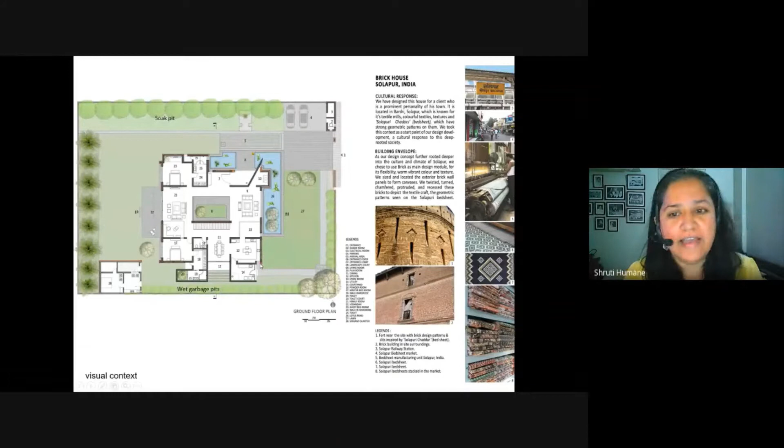So, these are the visuals, the first visual maybe, of how we approach the project and how it looks today. What the landscape does is only complement the building. It is something that gives a beautiful foreground, gives you a hint of what you can see further, a dash of red in the plant material just to complement the bricks themselves.

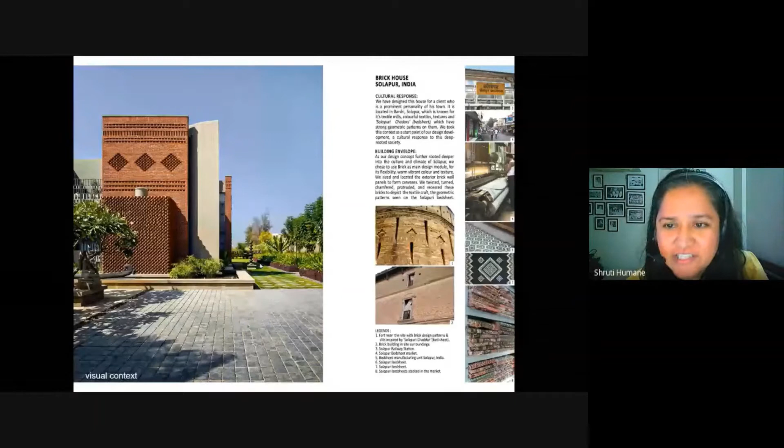This brickwork on site was extremely hands-on, so it was a big learning experience. We did every pattern here with our own hands along with the masons on site. So they were the teachers here for this particular project. It was wonderful working with them. The second, as I told you, was the climatic context. So it was an arid site.

So we had to go in for some architectural interventions like cavity walls. So these are the cavity walls, and this is how the rest of the panels come up one after the other. And every panel we have tried to be different. We have tried to have not a very 2D look, but a 3D kind of effect here by protruding, by turning the bricks around.

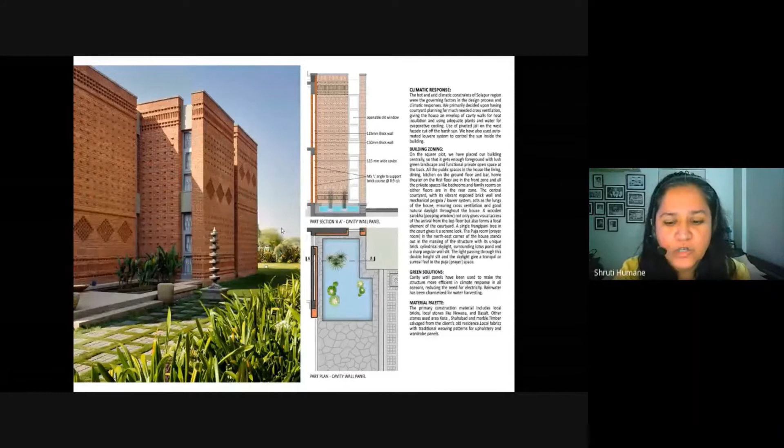The patterns also continue in landscape. I thought the landscape here just has to be supplementary in terms of the plant material, supplementary to the project itself. The water body helps us to take the cool air inside. So these are few of the 3Ds, study 3Ds that we made, and this is how it looks.

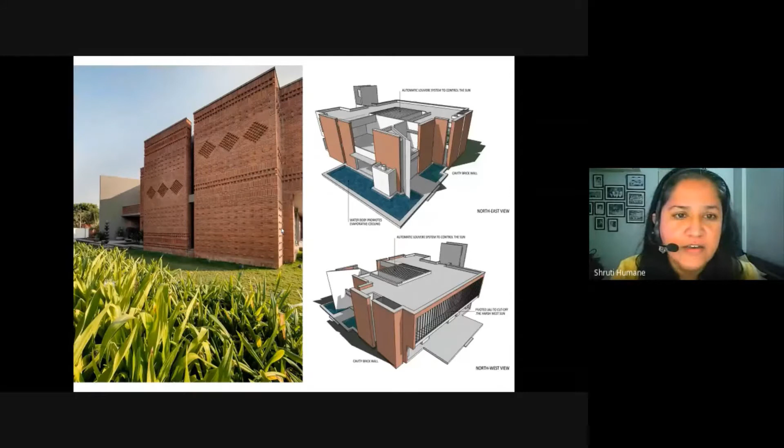So every panel is different. Every panel represents something different in the chadars. This is how it would look in the evenings. The shadows created are pretty interesting. These are few other landscape elements which create the foreground for the project. Another dash of red compound wall.

We also tried few other things like soak pit and taking the whole rainwater at one place. So this particular banana and the other places where that happens. So none of the water goes out of the site. So we have a soak pit. We have other few things that we have done from day one.

So for us, it was important that the architecture, interior, and landscape flow seamlessly into each other. There shouldn't be a boundary which restricts one from the other. So the flow is what, I think, has happened that way. So this is how you see it from the interiors.

This is the internal courtyard. We thought to keep it as minimal as possible because there were lot many things happening on the outdoor. So over here, to give it more of a zen feeling, to give it more of a minimalistic look, the central courtyard, which has a skylight or a big opening on the top, is very minimal.

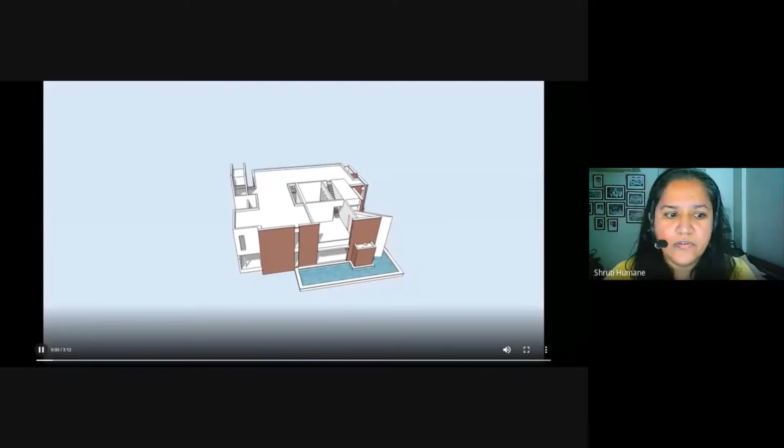Sandeep, I hope the music is here. Yes. Thank you.

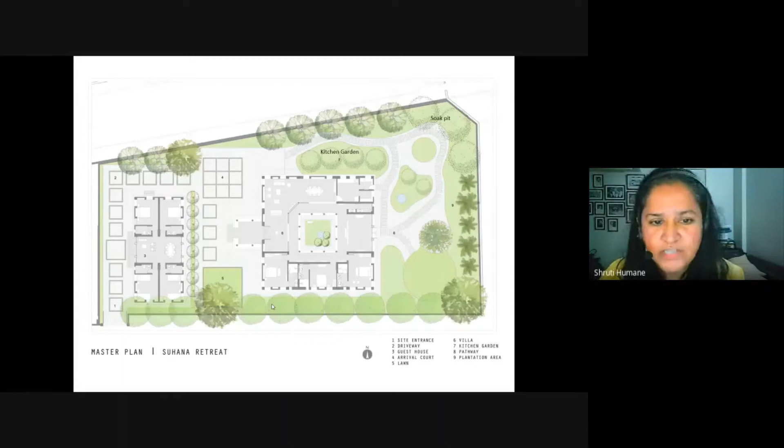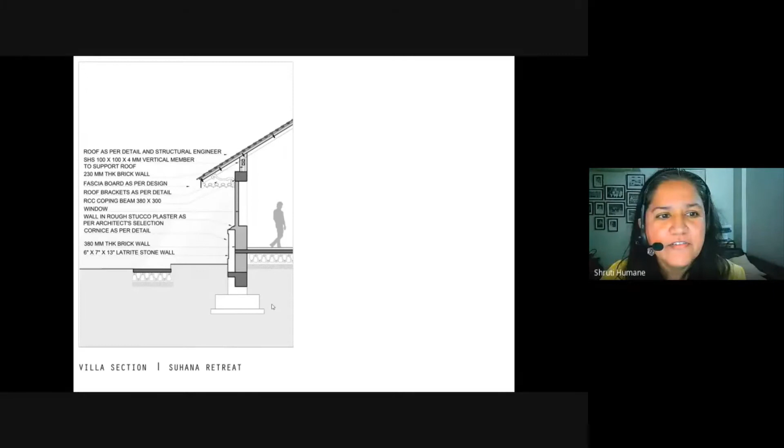It's a sloping roof project. So a few of the architectural sections with the courtyard, yes. The banana is here as well. A few of the architectural details. Yeah, this is how it looks now. Local material of laterite, kadapa is what we use the most in landscape. Rhoeos to complement the red of the laterite and the whole visuals.

This is the arrival area of the house, and this is the central courtyard. The structure here, the columns, the panel, everything we have salvaged from an old house nearby, and then we kind of used it. So it's extremely authentic to the place, I would say.

So this is that one old salvaged part, and then we have kind of used it everywhere. The plant material also shows the tropical Kerala heat. Again, this would also have a small movie clip for itself.

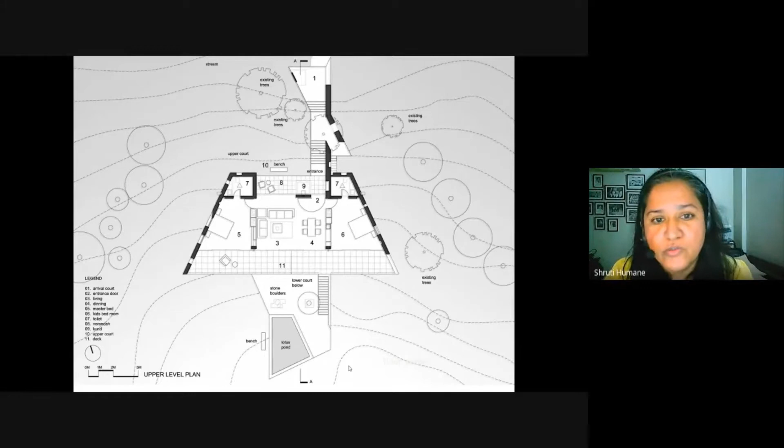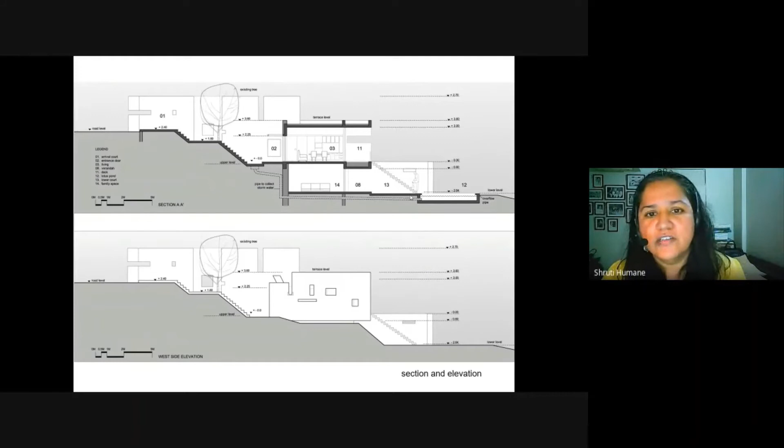Because it was a ridge and a valley situation, we had water flows which we tried to train below the building, have its overflow into a lotus pond that we created, and then beyond to a nala nearby. Here we literally did not cut and fill anything other than just the foundations. We used the topography the way it was. We hardly changed any of the natural stuff around.

The floating edge gives the box a sculptural feel, which was necessary to make it look part of here. It is a very modern looking box, but neatly placed on the side. We planted a lot of fruit trees around because this is part of a school which is called a heritage residential school, and there were kids coming.

So we have labeled all the trees that we planted. We have planted a lot; it's much denser now after the photography. So we have labeled all the trees. It's like a picnic for the school children that come to this house. This is the principal's house in the school. The interiors are very basic, just a dash of green with black and white.

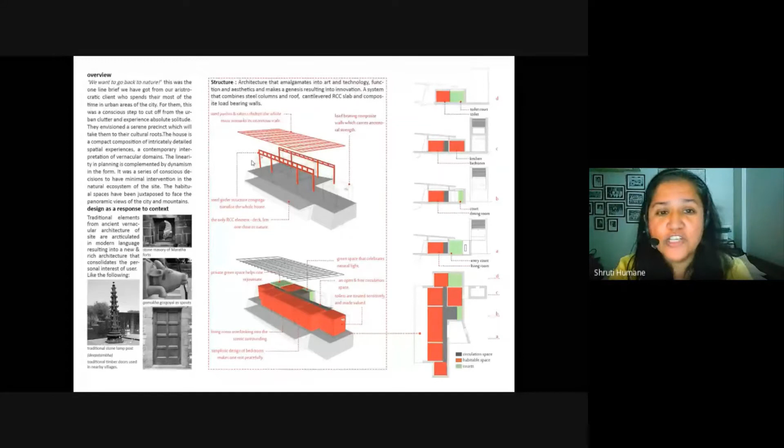So in this project we actually designed a section before we could design the plan itself. The section was devised, this is how it would sit on the site, and then we developed a plan for it. Because it was heavily contoured, we have done a few things like contour bunding. We did a lot of work on the kitchen garden and retaining every bit of water that comes to the site with soak pits, and the plant material which was there. We did not cut even many of the grasses which were around. Only the house part is what we changed.

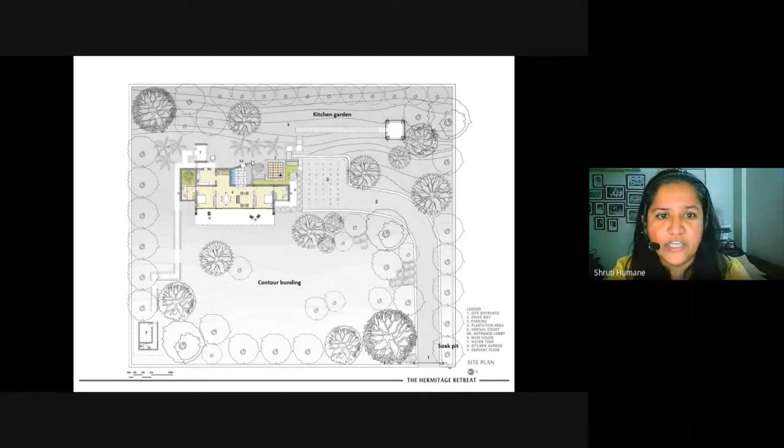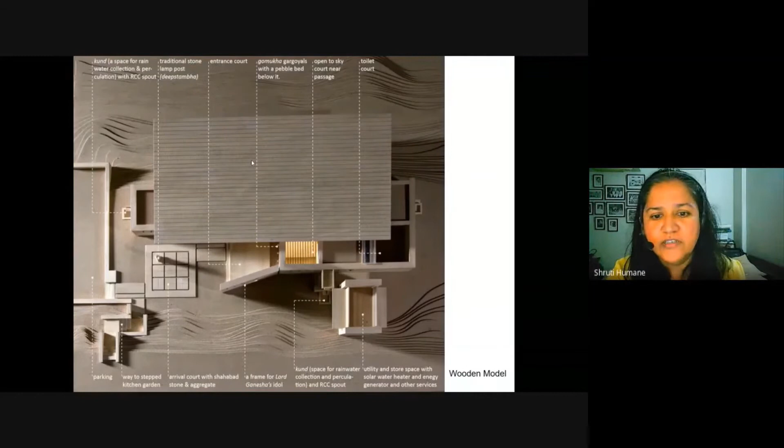This is the model that we made. So the designed landscape part is only around the house. The rest is the site itself, and we tried to bring in as many elements like the deepstambha, the kund, the gargoyles of the architecture around us in Pune. This was the section of the site and the building.

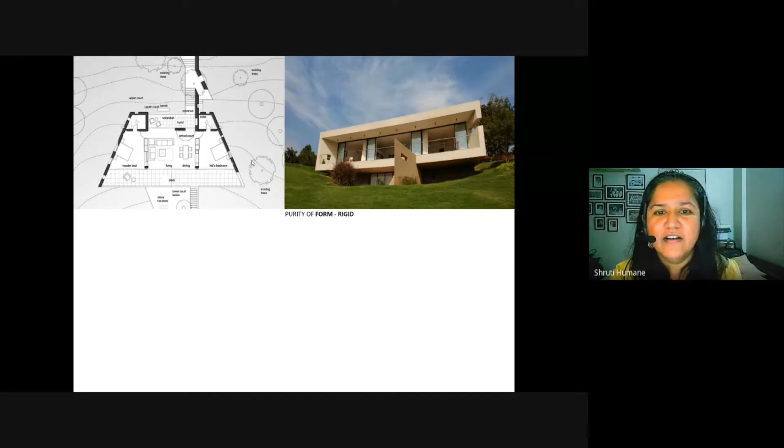This box might have reminded you of the project that I just showed you before this one. Yes, the planning is very much the same if you compare. That plan was treated like a form, a grid, a very rigid form, and we stayed true to it. This is a similar plan, extremely similar, but just the articulation of it is what has changed the looks and the feel of the site and the surroundings for us.

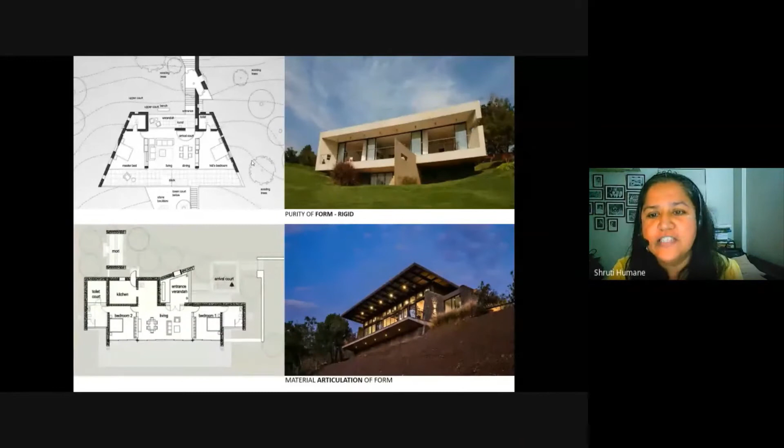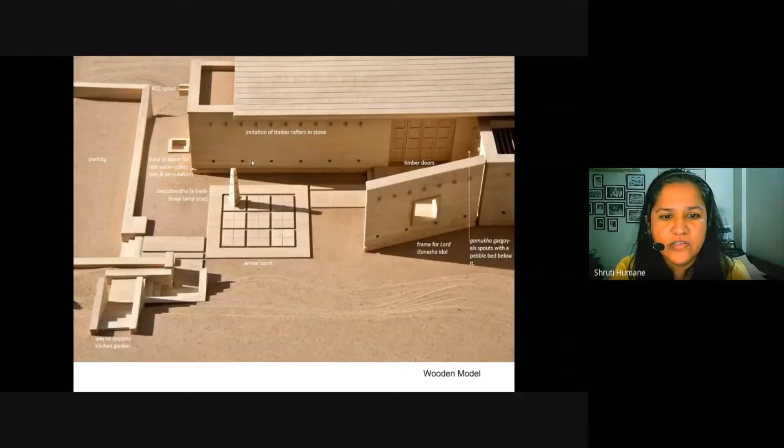Again, a small bit of comparison on the other side. I have used a lot of grasses here to again complement the ruggedness of this stone and the color that we get from the contrast. This is the small garden in front, and this is how it looks. The Deepastambha, the gargoyles, the Ganpati, which we have tried to frame, and a small toilet court. Every room here has its own court. Again, I would go for a movie clip here.